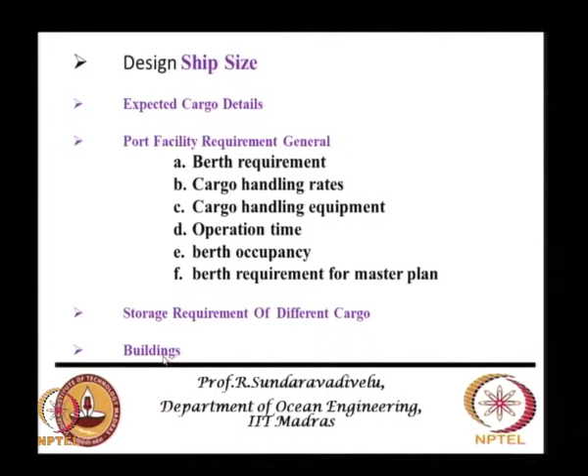Then receipt and evacuation of cargo, you have to know about the port access road, railway system, water and power requirement. Generally we have to provide desalinated water as well as water for the ships, power requirements also. Then we have to discuss the master plan of the port, and there are two parts in the master plan. One is inside the port harbor basin, another is the onshore landside facilities.

Then we classify the works into two categories, civil works and mechanical works. The civil works are generally breakwaters, berths, dredging, site grading, open and covered storage sheds, port buildings, railway and roads. These are the major components of engineering civil works.

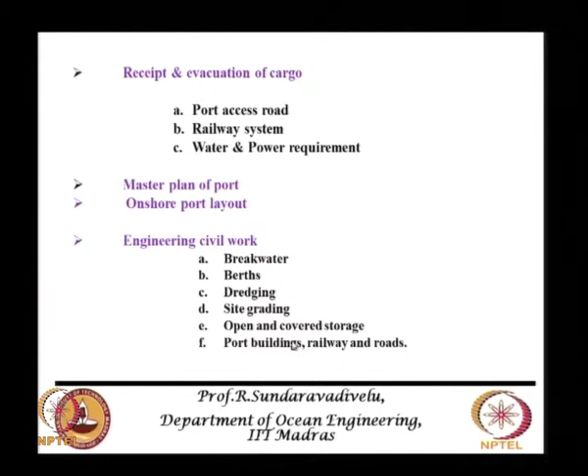And engineering of the mechanical handling system: ship loading and unloading system, conveyors, stackers and reclaimers, port handling system, break bulk cargo handling system. These are the various handling systems that have to be done. Then we also need engineering electrical works: electrical power source requirement, substations, illumination and cables.

So we have civil, mechanical and electrical works in a port. Generally civil works and mechanical works are almost equal cost. If you see major port facilities, the civil works and mechanical works, the cost is almost equal. Electrical works and utilities, that will be around 25% of the total cost of the project.

Utilities include buildings, roads, railways and railway exchange yard. I do not know, there is a mistake here: water drainage and sewerage, bunkering and security systems, port crafts like tugs, pilot and mooring launches. Then we have navigation: fairway buoy, channel marker buoys, beacons, transit lights, VTMS.

Now what is VTMS? Any idea? Vessel traffic management system. Just like an air traffic controller, there will be a vessel traffic controller there. It is not in place in Indian ports, but this is very much required. So every day if you are getting around 10 vessels, you have to manage how to bring these vessels in and take these vessels out.

Then fire and pollution control is also important. Fire control, you have to provide adequate systems for water to be pumped in. Pollution control, if it is a dusty cargo, you have to sprinkle water, you have to put some barriers. These are all the pollution control systems. Then we have port administration and management for terminal operations and organization structures.

So finally the DPR should consist of two parts, one is the capital cost, another is the operation and maintenance cost. I told you earlier, if you want to create a facility to handle 1 million tons of cargo, it will cost between 60 crores to 100 crores. That is the bandwidth of cost that will give you a rate of return which is sufficient for bankers to finance the project.

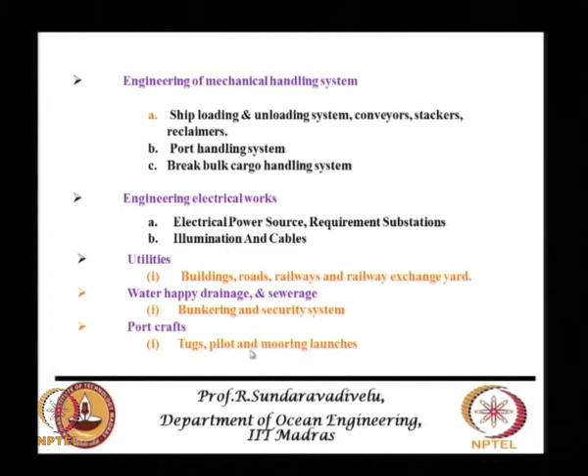Then you have to also write about the operation and maintenance cost. Some of the capital costs are covered by leasing equipment. I told you about this navigation, tugs, pilots, mooring systems, sometimes the cranes, sometimes some small feeder cranes or the forklift trucks. All of them are leased, then it will go into the operation and maintenance cost, it will not be in the capital cost estimate.

Then you have to also give the project implementation and the phasing of investment. That means when you want to implement the project, how much time do you think will be required for developing a greenfield port? What will be the duration? How much? Greenfield, 2 to 3 years, that is the usual period. Then you have to give the phasing of investment also. So this financial and economic analysis we have to give, internal rate of return and things like that.

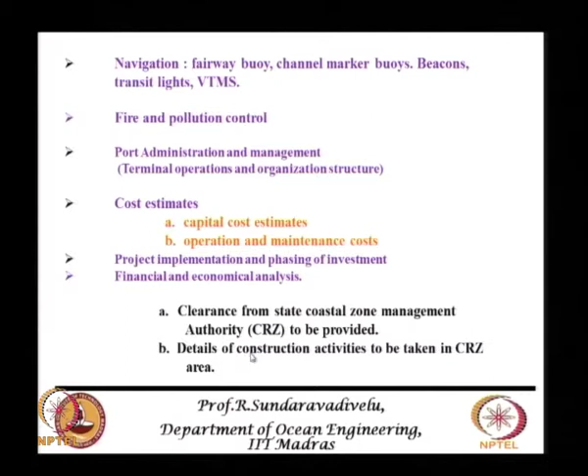Once you complete all these facilities, you have to get the clearance from the State Coastal Zone Management Authority, then you have to give the details of construction activities to be taken in the CRZ area, then you have to get the consent to establish, then you can start carrying out the project. These are the various steps involved in getting the clearance.

So there are certain basic designs that are required that we will be seeing in today's class. One is navigation channel design. One part of the navigation design is that it can be either single lane traffic, that is called one way traffic, or two way traffic. You should know what traffic you are carrying.

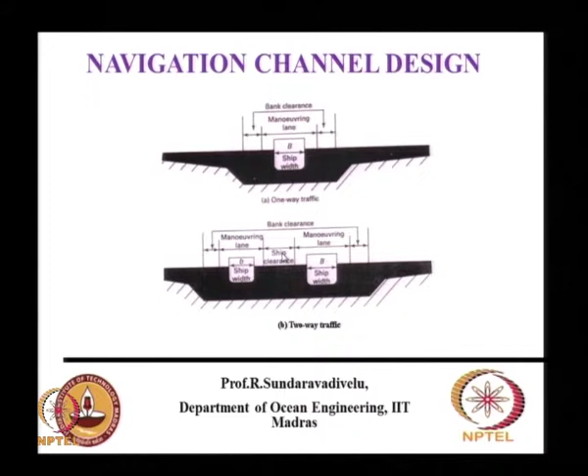So this should not go very close to the bank, there will be some suction effect from the banks, so you have to provide a bank clearance, and then you have to provide a maneuvering lane, because when you are moving the ship it will not go in a straight line, it will go this way and that way. In the case of two way traffic, you have a bank clearance, a maneuvering lane, and in addition a ship clearance between the two ships' maneuvering lanes. This is basically what is required in a navigation channel design.

So for multi-channel you have to separate maneuvering lanes by a ship clearance lane. So this degree of interaction, how much you have to provide, depends on the channel shape, it can be straight or it may be curved, what is the depth of the channel, what is the speed of the vessel, what is the current, swell and wind.

What is the vessel speed normally inside a harbor basin when you want to bring it in? How much? Normally it is about 2 to 3 knots, it's about 1 meter per second. They sometimes switch off the engine and the tugboats will bring it in. Currents are very serious considerations if the current is perpendicular to the direction of the ship.

What is the difference between swell and sea? Ocean engineering students, what is swell and what is sea? Both are waves, what is the difference? Not ripples. Due to wind, if the waves are created at the same location, it is called a sea. Suppose it is created near Bengal and comes to Chennai, it is called swell. So the waves are created elsewhere, then it comes here.

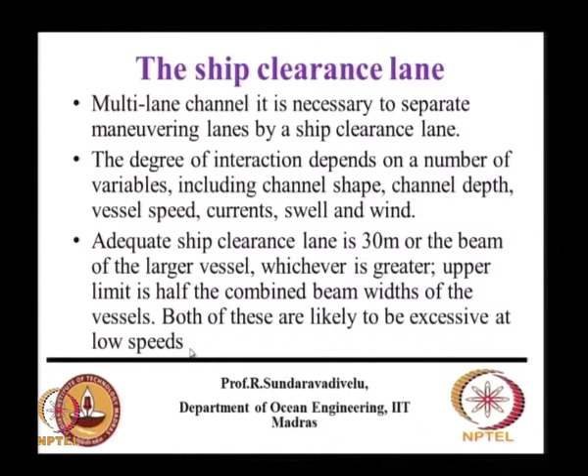So the ship clearance lane is about 30 meters or the beam of the larger vessel, whichever is greater; upper limit is half the combined beam widths of the vessels. Both of these are likely to be excessive at low speeds. Suppose the speed is less, whatever you are providing, 30 meters or one width of the ship or half of the bigger ship plus half of the smaller ship width, it is excessive if it is a low speed.

Bank clearance is when there is a suction due to asymmetrical flow of water around the vessel, you have to provide the bank clearance. Generally we provide a trapezoidal section, this will produce less suction than a steep-sided canal section. So if this slope is steeper, the suction effect will be more, if it is trapezoidal it will be less.

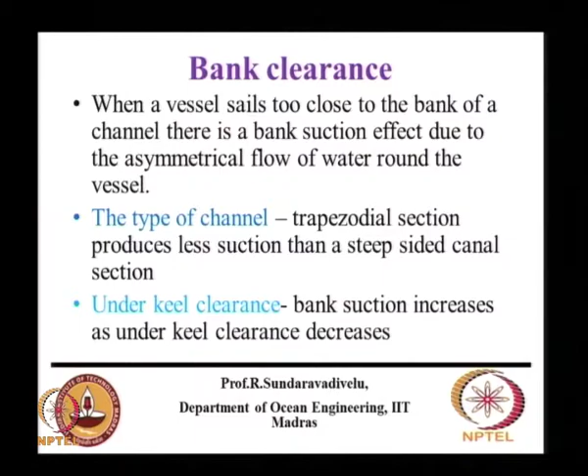Underkeel clearance, sometimes called UKC: bank suction increases as underkeel clearance decreases. So this bank suction also is a part of underkeel clearance. How much underkeel clearance do we provide generally? It's not in meters, it is a percentage of something. What is it? 10% of the draft if it is inside a harbour basin, if it is outside a harbour basin it is 20% of the draft.

So this gives the total channel width requirement, widths of all the three lanes. Then the Permanent International Association of Navigation Congresses recommends the total width of the channel. For a single lane it is between 5 to 7 times the vessel beam depending on the sea and wind condition, that is between 5 times the beam of the vessel to 7 times the beam of the vessel. The double channel is about 9 times the width of the largest vessel.

So this is some approximation. Normally the length of the ship is equal to 7 times the beam of the ship. So the width of the channel also you can assume approximately as equal to the length of the ship. Why should we worry too much about this navigation channel? What are the implications?

You are designing something, I am teaching you how to design. If you do not design it properly, what will be the consequences? You have to answer when you are designing something. Suppose you have to provide 7 times the beam of the vessel, suppose you provide only 3 times the beam of the vessel, what will happen? What will happen if the width is less? It is not getting grounded, it may go and hit the sides, then it will get grounded. Possibility is the ship will not come inside.

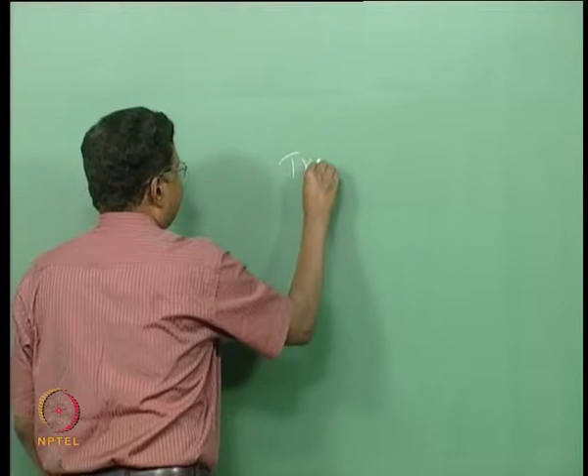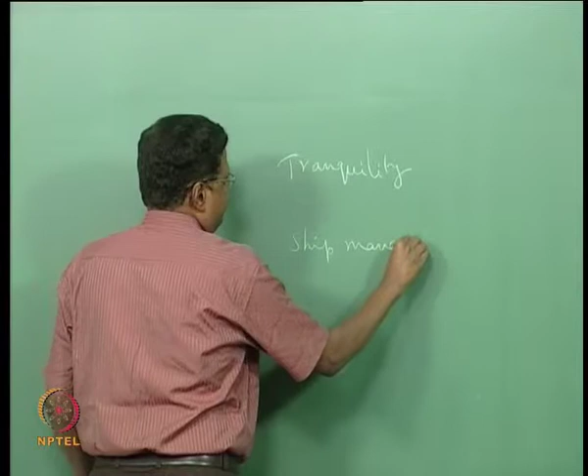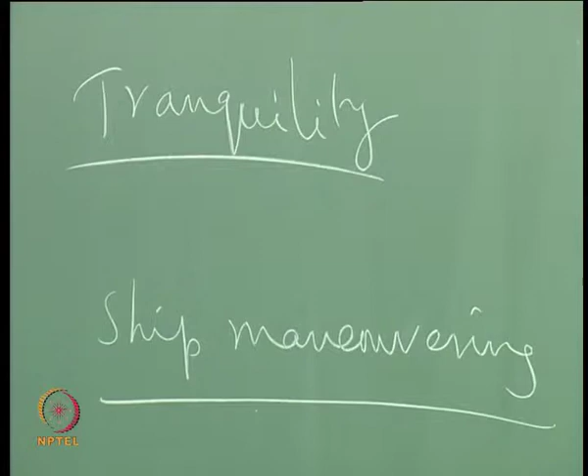So in a DPR we need these two studies, tranquility and ship maneuvering. So these two aspects are to be studied carefully. Tranquility means what will be the waves inside the harbour basin. So if you provide more width, the waves will pass through the width of the channel, and more depth also will transmit more waves inside. So that also has an impact.

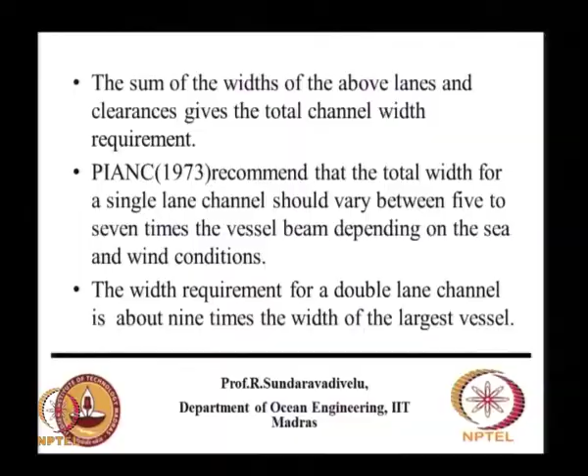So what are all the design approaches for this channel design? First you have to select the design vessel. A design vessel is based on the overall economic interest of the port in question. So when we want to select the design vessel, you should see for a type of cargo, the majority or maximum share of the cargo, in what size of vessel it is being transported. So you have to design for that vessel.

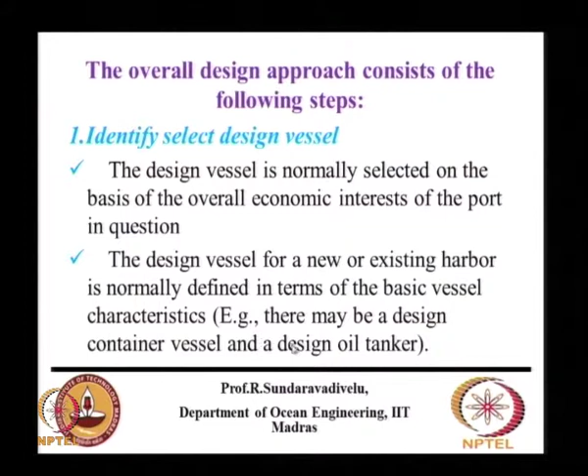So these basic vessel characteristics you have to design for, whether it is a container vessel or oil tanker or things like that. Then you have to find out the environments like water depth, tide, current, wave and wind. Also you have to establish the vessel speed and tug assistance. If you provide better tug assistance, then you need to provide lesser width, and maneuvering becomes easier.

You have to estimate the required channel depth. To estimate the channel depth you have to find out the under keel clearance. What is told is approximate, but you have to calculate. It depends on various parameters like trim, squat, type of seabed. If it is rock you have to provide more under keel clearance, if it is clay soil less. You have to estimate the channel width. This can be done by a maneuvering analysis.

You have to put the channel over the existing site bathymetry, then do a simulation with the channel dimensions. You can have a real time simulation. This real time simulation is just like aircraft pilots get training. Similarly the ship pilot will do a simulation. The real time simulator is there in Indian Maritime University. One more private engineering college also has this simulator.

There they will mark the layout of the channel, bring in different types of vessels, put different environmental conditions and see whether they are able to bring the vessel inside. Then you have to find out the requirement of navigation aids. There will be some marker buoys which show where the channel is, that is the navigation aid. The vessel traffic management system, VTMS, also will give a lot of aids.

Navigation aids are not only the buoys on the entrance channel; there will be a navigation tower which is the tallest building in a port. From there, just like an air traffic controller sits and sees all the vessels coming, from this tower also they will be giving aid. There will be some lighthouse kind of thing in the navigation tower that the ship can see, and there will be 2 towers, so you can align the ship. With one tower you cannot align, so there will be 2 towers.

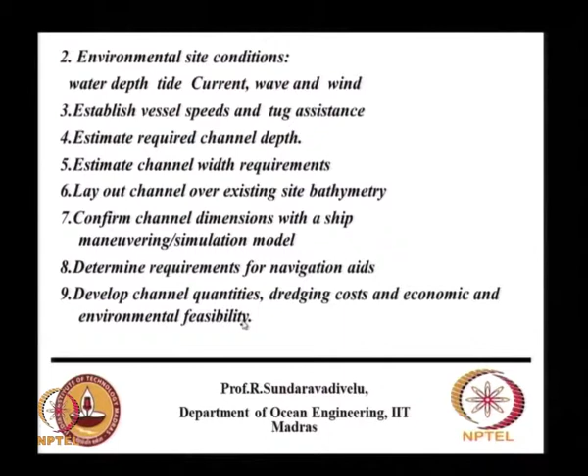So you have to calculate the dredging cost and economic and environmental feasibility. This we have discussed just now. So we have to develop the natural channels in waterways that are naturally deep or at least deeper than alternate harbor locations. This is how you have to decide.

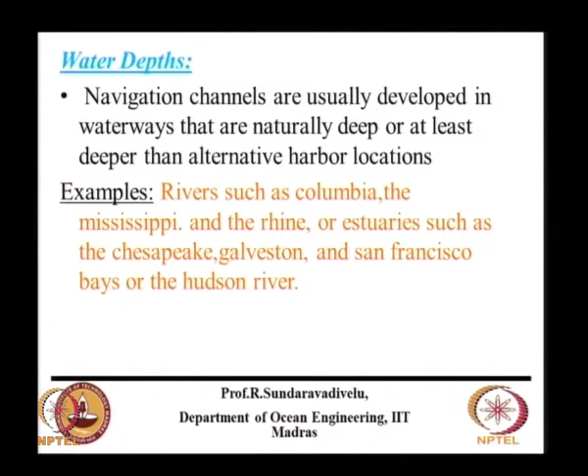Suppose nowadays we have to bring a vessel of about 12 meter draft, and 14 meter depth is required. Normally we see at what distance from the shore about 10 meter water depth is available, because 4 meters you can dredge. 10 meter depth is available at a distance of about 600 to 800 meters in Gopalpur port, so you can select that location. Whereas at Paradip, developed long back, the 10 meter contour was more than 1.5 kilometers away, so that was not a correct location. Location depends on where the deeper contours are available closer to the shoreline. For rivers also they give details on which rivers are better.

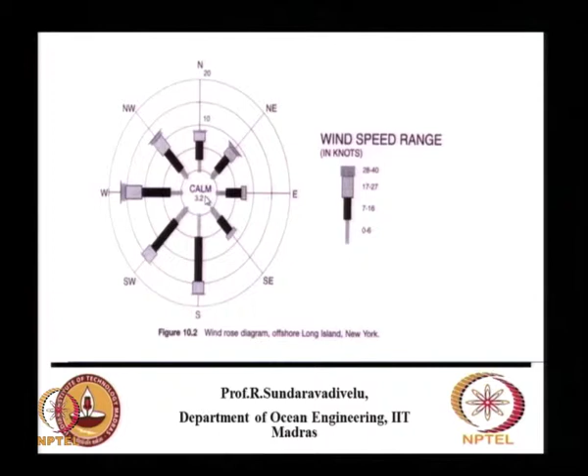5% of the time the winds are coming from the southern direction with a speed of 0 to 6 knots. About 10% of the time it is coming at 7 to 16 knots, and about 2.5% of the time it is between 17 to 27 knots. So like that you can find, and calm, very close to 0, is about 3.2%. This is the wind speed wind rose diagram.

Wind also has significant impact, but the waves can have a significant bearing on navigation channel depths and widths. This is mainly for the outer portion of the entrance channel, where vessels must transit without protection from ocean wave attack. Currents also have a considerable impact. The currents can be of tidal origin, may be the result of river flow, or both. River flow means it is from the river to the sea; tidal means it can be into the river or out of the river.

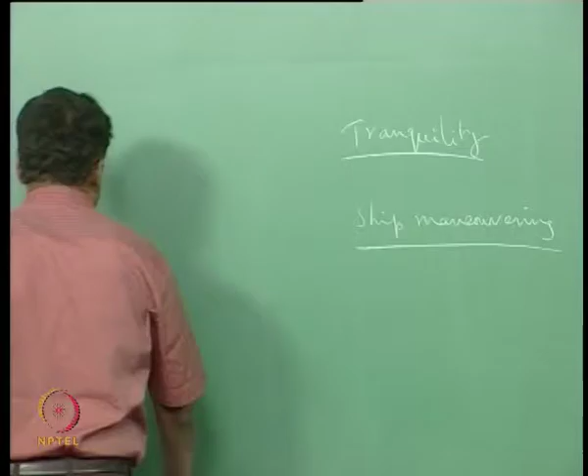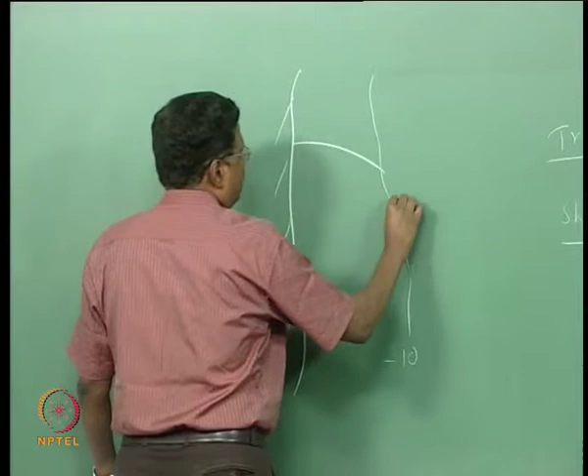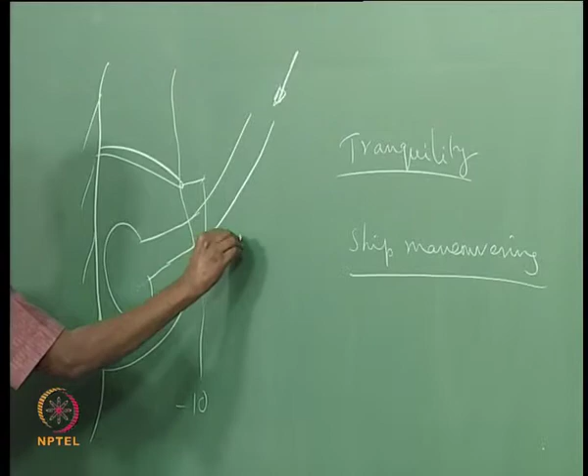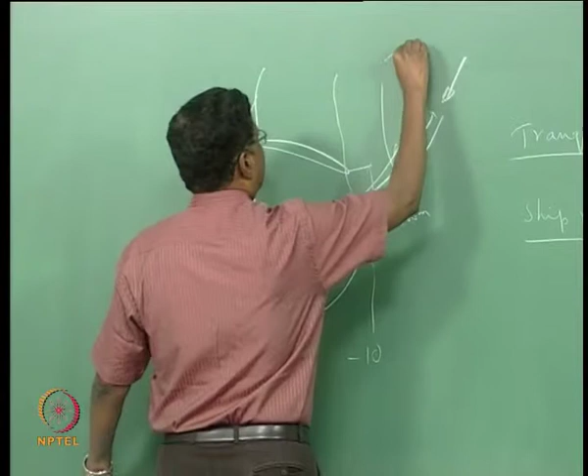Suppose you have the shoreline here and you have 2 breakwaters. Generally the breakwaters are stopped at the -10 contour, then we have a navigation channel. Depending on the direction of wind and wave, we orient the channel. Typically the width of the entrance channel is about 400 meters, this is about 200 meters. The length of the channel from the center line to this is normally about 7 times the length of the vessel, typically around 1500 or 1600 meters. This is a normal behavior.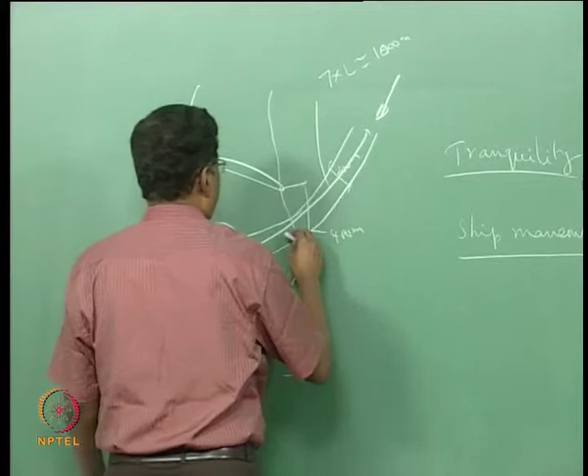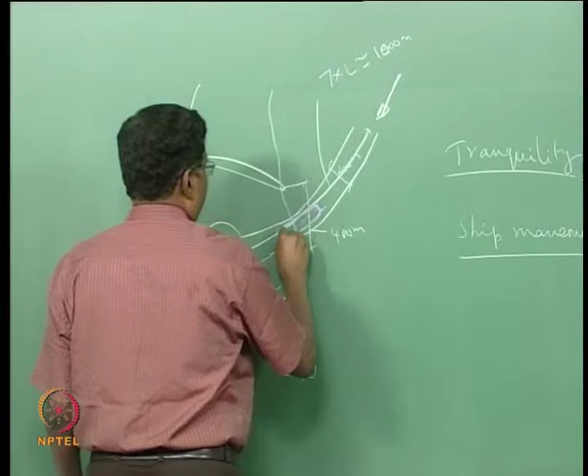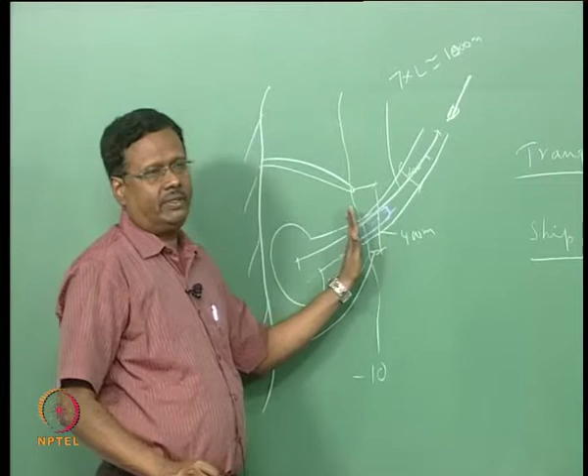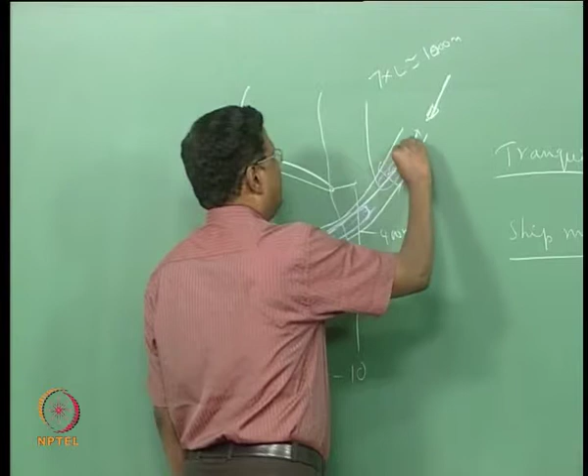The problem for the ship comes when 50% of the ship, the major portion of the ship, so this is the center line of the ship, some portion of the ship is inside, some portion of the ship is outside. This is very critical, because this portion of the ship is subject to less wave and current, whereas this portion of the ship is subjected to more wave and current. Suppose there is a ship here, the maneuvering is not that difficult; even though the waves are higher for the full length of the ship, it is not very critical.

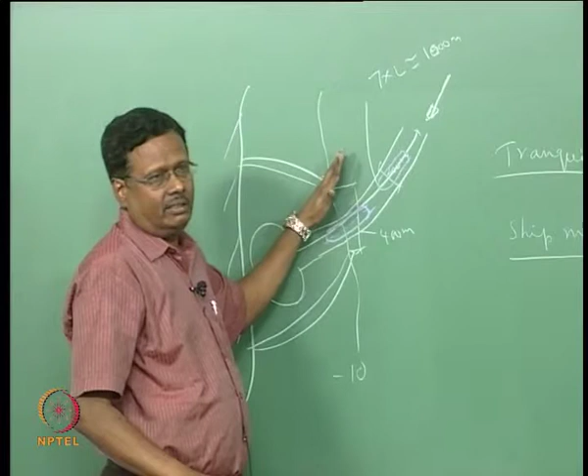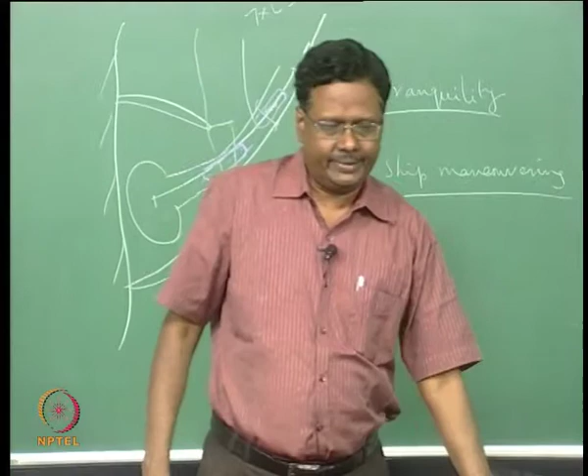Another thing is if there is some slight tilt, it will go and hit the breakwater or some structure. So this portion, that is what is written there, where vessels must transit without protection from ocean wave attack. Otherwise it does not create a problem.

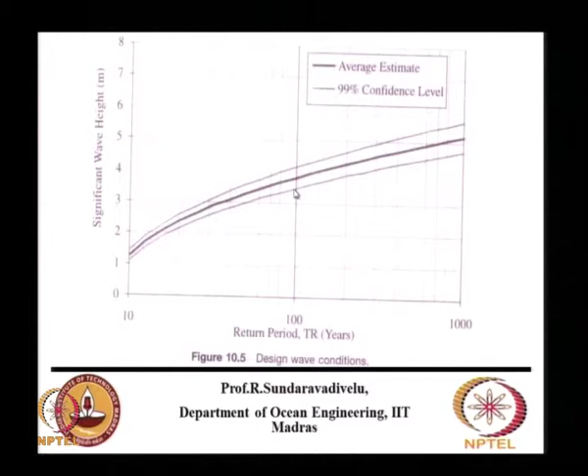So, this channel depth. What we have discussed so far is what wave, what wind, what current is to be considered, then you have to go for the design. One is the loaded vessel draft. If you see the ship, there will be some trim, it may be inclined like this because of how you are loading the ship. Then squat, and there will be wave induced motions, 6 motions due to wave: heave, surge, sway, pitch, roll and yaw. Then you have to give the safety clearance.

The safety clearance depends on the soil type. If it is rock, you have to provide more safety clearance. If it is clay, you can give less safety clearance. Then you have to talk about the dredging tolerance. When you want to dredge exactly minus 14, you may not be able to do it. So you have to give some tolerance for dredging, normally about 0.3 meters. Then there is what is called advanced maintenance dredging.

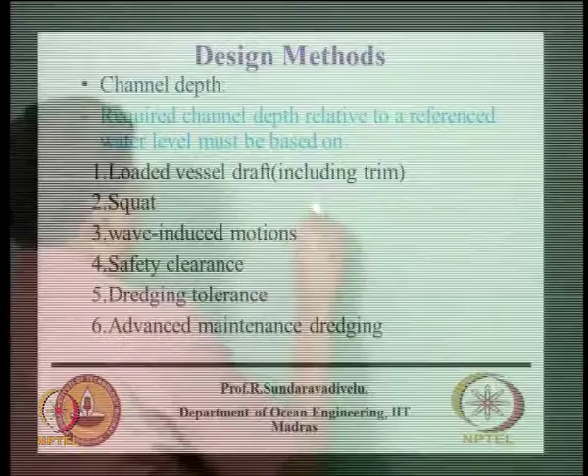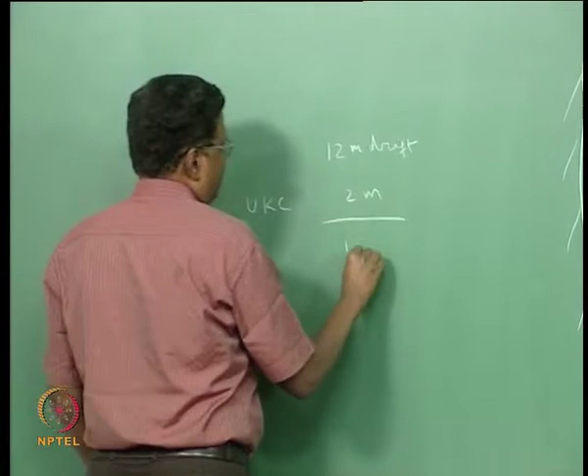Sometimes what they do is, if you want minus 14, including dredging tolerance it becomes minus 14.3, and every year you assume about 10 centimeters of siltation takes place. If you want to do maintenance dredging only once in 5 years, then you go in for 14.8 meters. So, 12 meters is the draft, we have an under keel clearance of 2 meters, so you calculate 14 meters. Then you have the over dredge allowance.

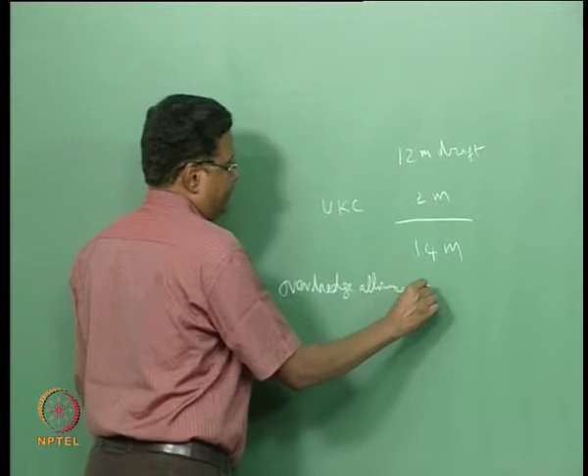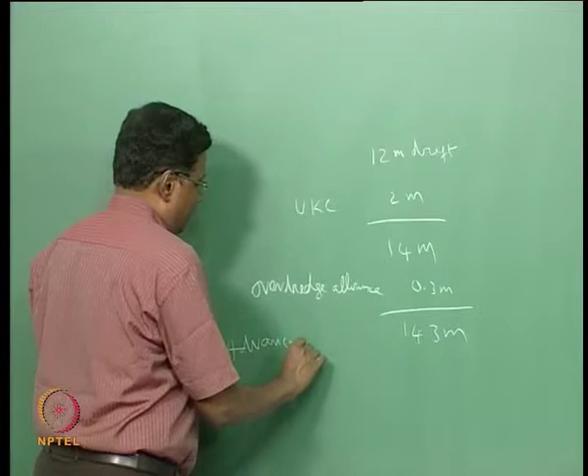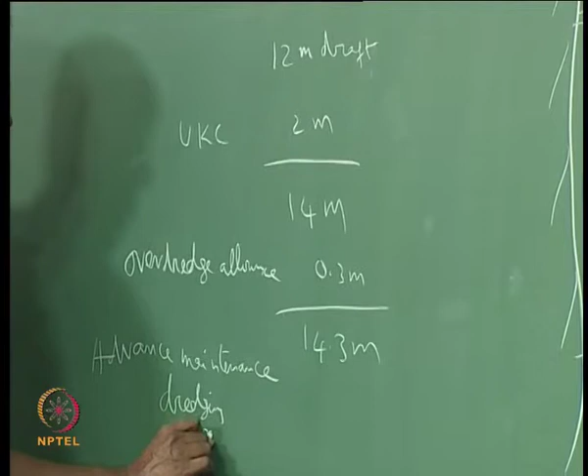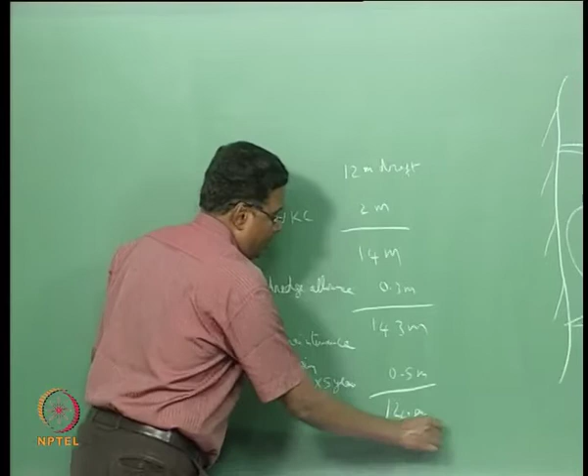14.3 meters. Then you have advanced maintenance dredging. This acts like a silt trap. If you assume it will take 0.1 meter per year, multiply by 5 years, and it gives 0.5 meter. Then you do capital dredging itself as 14.8 meters. Sometimes it can be 0.2 meter, can be 0.3 also.

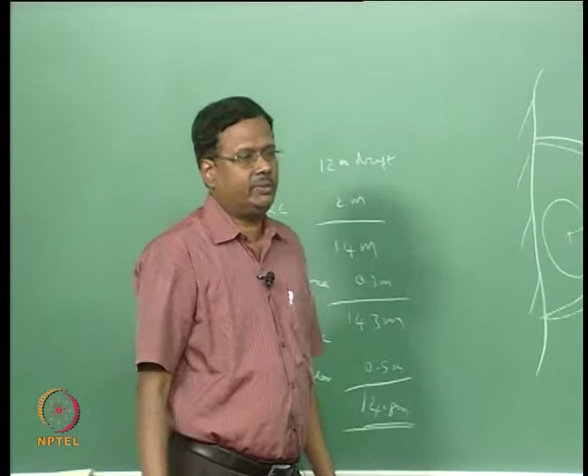So you dredge more initially, which will be less expensive, and maintenance can be done once in 5 years. Some ports do not carry out this advanced maintenance dredging, but we normally recommend this advanced maintenance dredging.

We are designing a floating dock in Port Blair. The floating dock is kept by the side of the berth. The floating dock is maintained once in 5 years. So below the floating dock, for 5 years we do the advanced maintenance dredging, where the floating dock will be in the same position for 5 years.

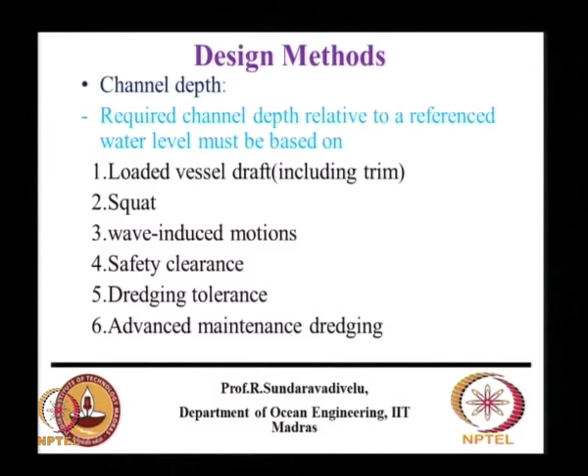So the vessel draft can be fully loaded or lightly loaded conditions. So you would normally take the fully loaded. Sometimes we have to limit drafts to assure safe navigation. That means we may not load the vessel for the full load to aid navigation. For example, if the port is designed much earlier and it cannot take higher draft,

but you cannot go and change the vessel, because there is a particular type of vessel which is most commonly used for a particular type of cargo. This point is clear, you cannot change the size of the vessel because it will not be available. Use the same vessel, but use it for lesser draft. That means instead of 100% loading the vessel, they may load 70% only, then bring the vessel inside.

In Goa they do something else. There they are loading iron ores, they bring big size vessels which will go mostly to Japan and China, where the vessels can have a draft of 17 meters, draft can be 17 meters, not the depth, whereas in Goa it can be only 12 meters. What they do is they load for 12 meter drafts in Goa port, take the vessel outside.

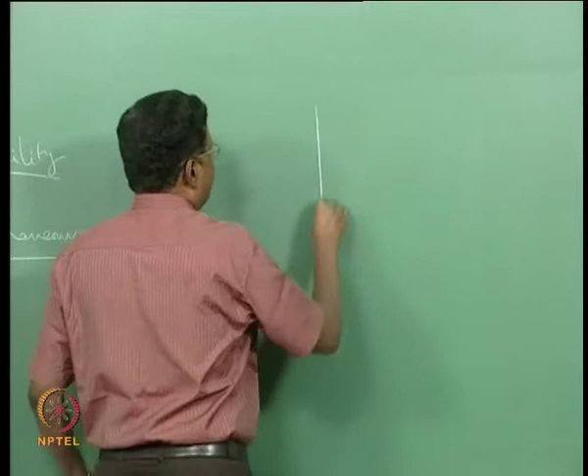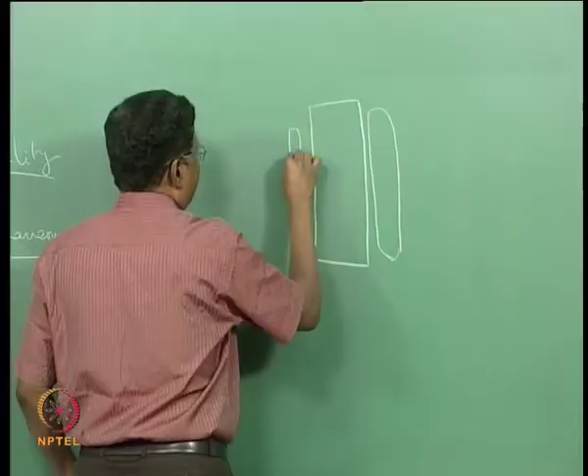Then in the open sea they do a transshipment terminal, that means you will have a transhipper. Transhipper is just like a ship with some crane facilities. Then you bring the vessel on one side, bring small barges which are coming from rivers in Goa. So there will be cranes here which will take the cargo from here and load it here.

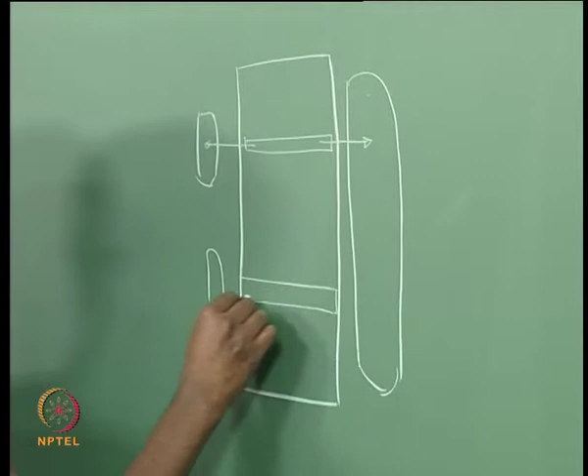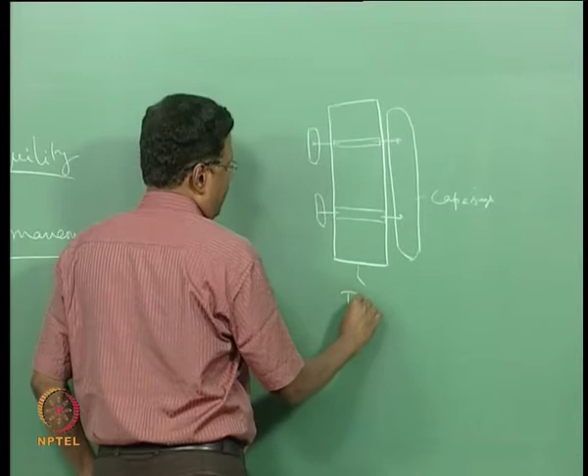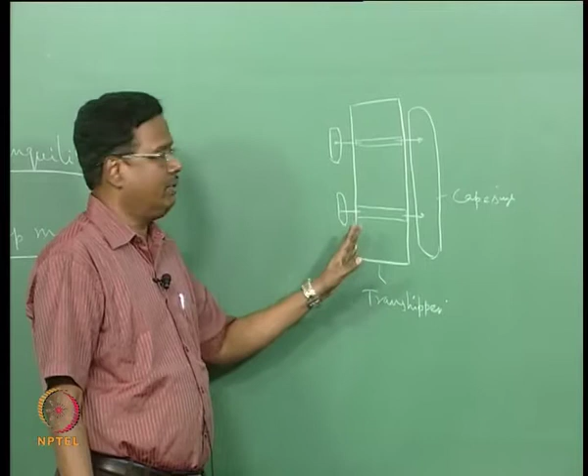So this may be a cape size vessel which the Goa port will not be able to handle. So they will put a transhipper here and go to 20-meter contour or 30-meter contour. This is being practiced now. So they will have only 70% draft inside the harbor basin, then bring it here and top it up and take it to Japan, because you cannot go with the empty 70% loaded draft all the way to Japan.

The reverse also is possible. In Tuticorin port they want to do like this, they will bring a bigger vessel, they will lighter the vessel, then bring it inside the harbor basin.

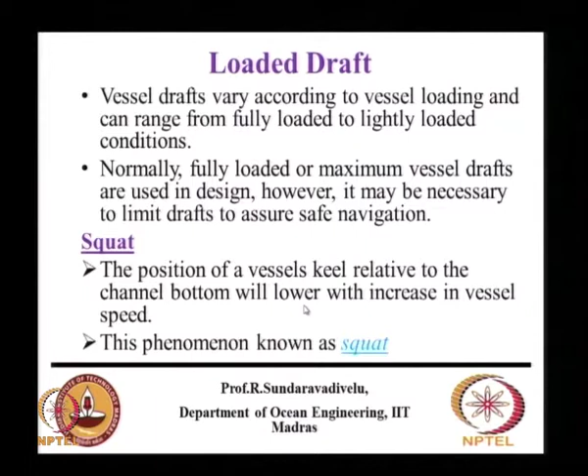So today we will discuss about the squat. Squat is the increase in the draft. So the position of the vessel keel relative to the channel bottom will lower with increase in vessel speed. That is, this is the bottom of the vessel, this bottom of the vessel will go down, that means the clearance will become less in the restricted waterway.

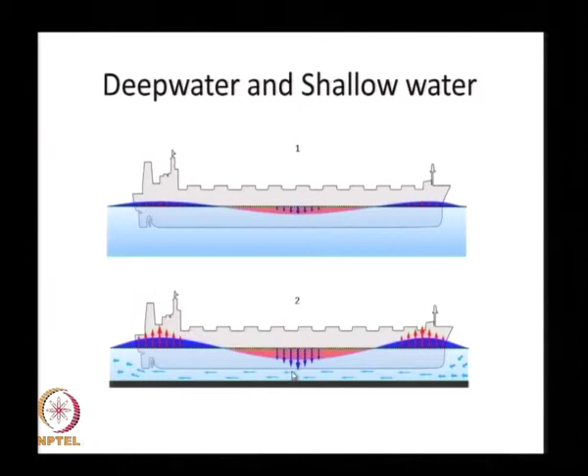So there is the effect of bottom here. So in shallow water this water between the ship bottom and the seabed is compressed and flows faster. According to Bernoulli's principle, the pressure decreases when the ship speed increases. So when the pressure is decreasing, then the ship will go down, a low ebb is formed attracting the ship downwards. Before and after this hollow the waves are also higher, this is what is called squat.

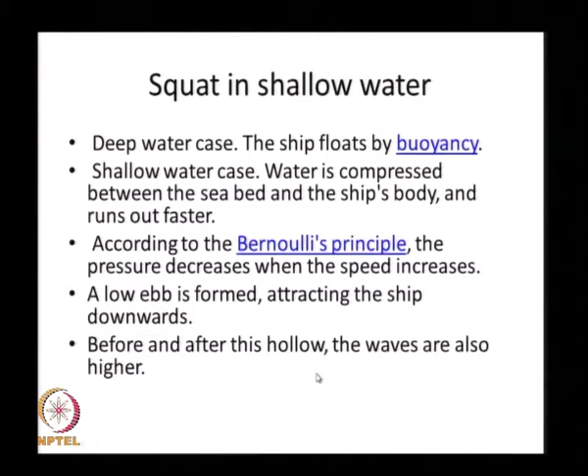So when increased water velocity flowing past a moving ship will produce a localized lowering of the water surface. Squat is a function of vessel speed, underkeel clearance, channel width and depth, and vessel dimensions, and this squat varies with the square of the forward speed. So the more the speed, the squat, meaning how much clearance got reduced, increases with the square of the forward speed. Squat increases as underkeel clearance is reduced. Squat is larger for width restricted channels than in open areas. If the width is restricted, the squat will be larger. So you have to take care of this squat, then finalize the design.